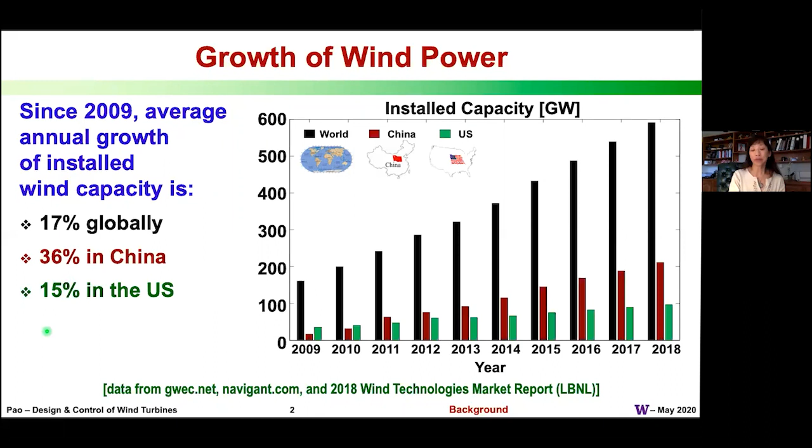Over that decade, the global installed wind power capacity grew at an annual rate of about 17%. And I think it's pretty safe to say that in 2020 now we're beyond 600 gigawatts of installed wind power capacity worldwide. The number one country in terms of installed wind power capacity is China, and they've had an incredible annual rate of growth of about 36%. The US is actually number two, and we've had an annual growth of about 15%. Together, China and the US have more than half of the world's installed wind power.

Now, another way that we can compare countries in terms of wind energy is to look at wind penetration. Here what we mean is the amount of a country's electrical energy needs that is being met by wind. In this regard, Denmark is by far the number one country. In Denmark, more than 40% of their electrical energy needs is met by wind energy, and this is an average across a year. They do instantaneously hit 100% wind penetration at times, in which case they're trying to export their wind power to nearby countries. In general, European countries do quite well in terms of wind penetration.

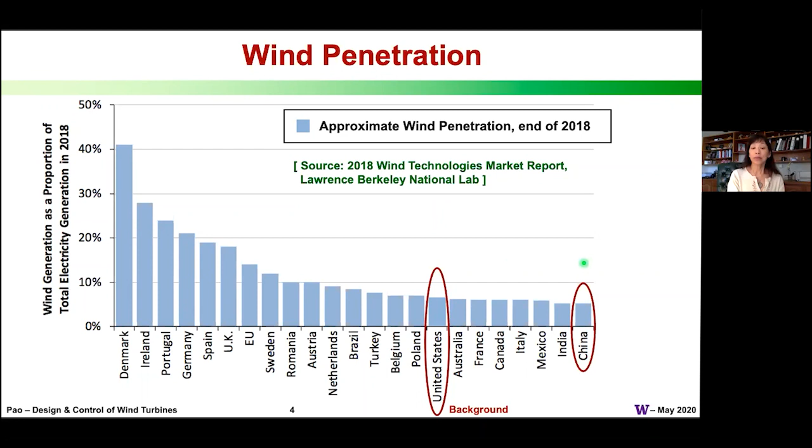China, for all its installed wind power capacity, actually is only at 5% wind penetration. They have a very large population, so large electrical demand, and only 5% wind penetration. The US has a lower population, but we tend to be energy hogs, and so we only have about 6.5% wind penetration. But the point here is that there is a lot of room for growth.

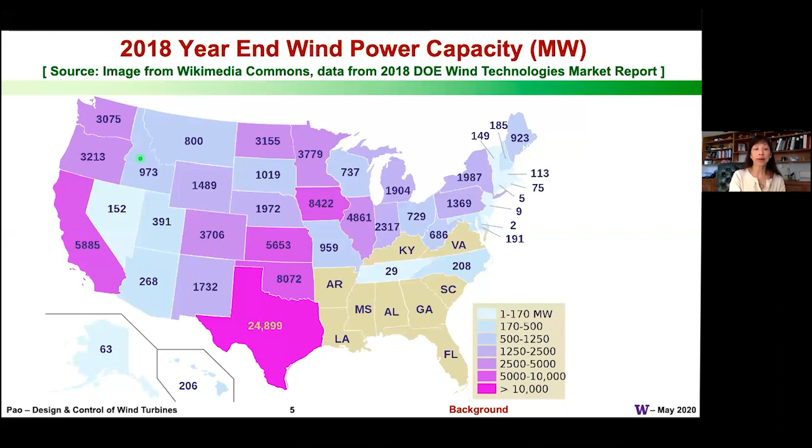Now, I thought it might be fun to look by state, and in terms of installed wind power capacity, Texas is by far the number one state. In Colorado, we're not doing too badly. We're ranked 8th, and Washington State also does pretty well. You're ranked 11th. Now, if we look at wind penetration, Kansas is the number one state, and Iowa also has more than 30% wind penetration. So Colorado and Washington State do relatively well in the top 20.

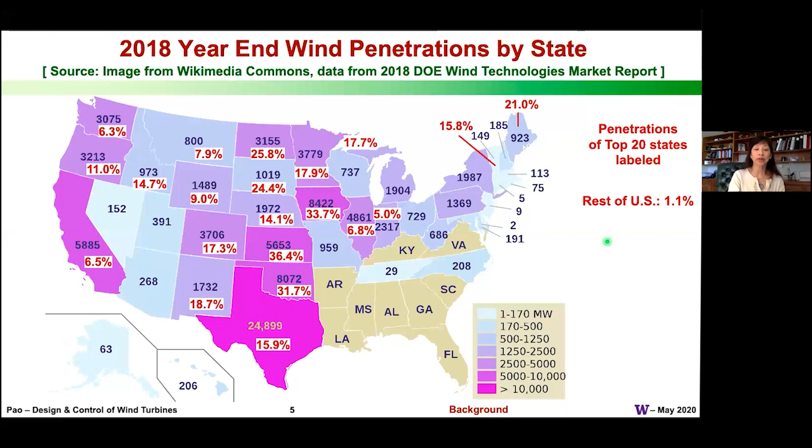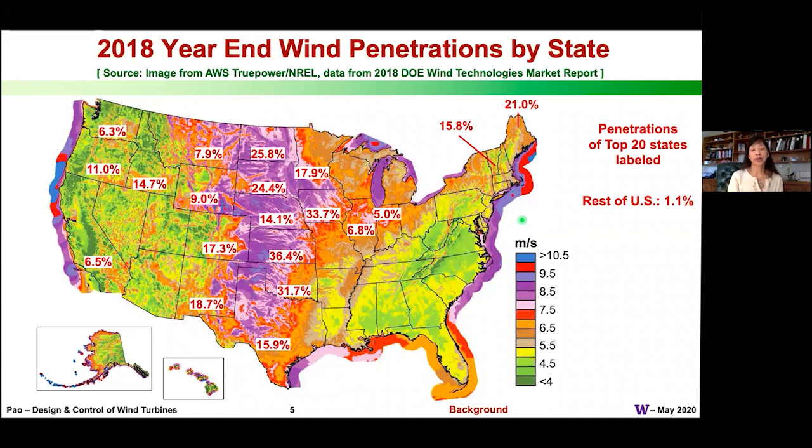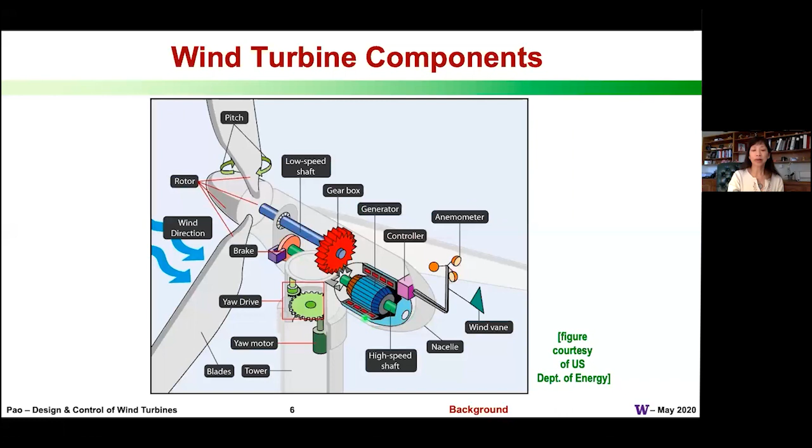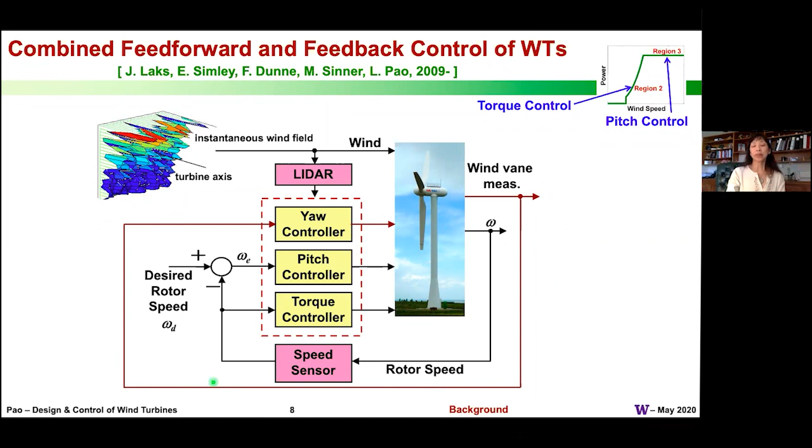So I wanted to give this overall view of some of the work that we've done in combined feed-forward feedback control of wind turbines. But that's not the main focus of this talk.

In this talk, I'd like to highlight a large interdisciplinary project that we've had the privilege to be a part of. We're trying to design a new concept wind turbine at a very large scale. We ended up having to work very closely together as a large team, and we developed what we call this aero-structural control co-design approach to optimize the design and control of this novel concept turbine. I'll talk about some field testing that we've also done for the novel concept turbine, and I'll talk about a control approach that we're developing that helps us to reduce the cost of wind energy. Then I'll summarize, and as there is time, I might briefly outline some areas of ongoing and future work.

The main points of the earlier discussion on wind energy are that the wind industry generally is doing pretty well. This pandemic has thrown a wrench into the wind industry as well as many other industries, but hopefully the wind industry will continue to do well. And the other main point is that there's still a lot of room for growth for the wind energy industry, and in particular for US wind energy.

What the wind industry has continually tried to do as it competes with other sources of energy is to continue to drive down the cost of wind energy, to drive down what we call the levelized cost of energy. This LCOE is equal to the sum of the costs over the lifetime of a power plant. This could be a wind farm, it could be a natural gas plant, whatnot. And the denominator is the sum of the energy produced over the lifetime. LCOE is used to compare the cost of one type of energy with another type of energy.

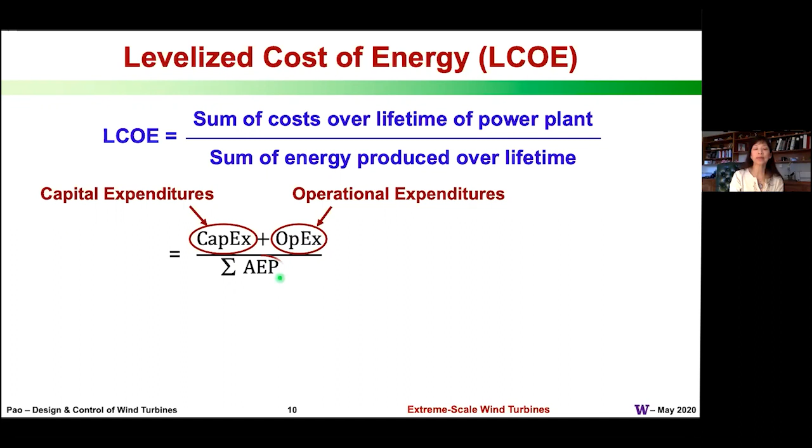In the numerator, the costs include the capital expenditures. How expensive is it to build that wind farm? How expensive is it to build that natural gas power plant? Also included in the numerator are the operating expenditures. How expensive is it to run the wind farm? Included in the operational expenditures are the fuel costs, which happen to be free for wind, solar, and hydro. It's not free for fossil fuel-based power plants. In the denominator, we sum the annual energy produced over the lifetime of the power plant. So what we want to try to do is minimize the numerator and maximize the denominator.

Now, usually in my past work, and for most of us on this large project team, we've never really considered levelized cost of energy. The way things have always been translated to us as control systems engineers is that in region 2, we want to try to maximize power capture. In region 3, we want to try to regulate power capture.

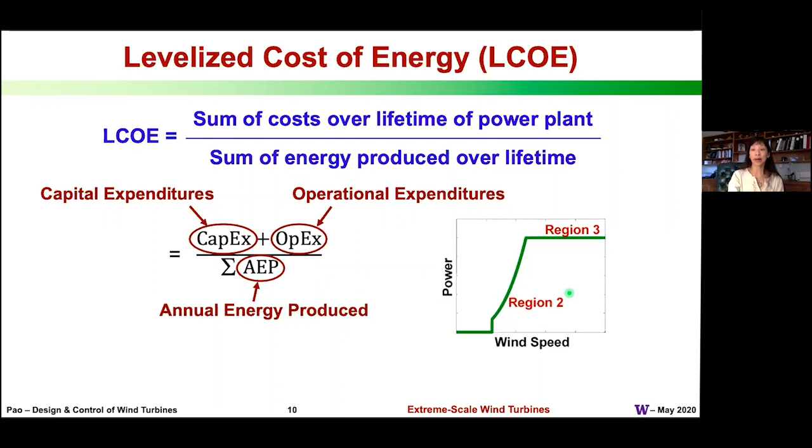And as we've better understood the overall goal of trying to reduce the levelized cost of energy, that has also opened our eyes to maybe try to do the control in better ways. And I'll briefly touch upon that later.

So how has the wind industry largely tried to drive down the levelized cost of energy? It's largely done so by going to larger and larger wind turbines. And as it has gone to larger turbines, that levelized cost of energy has generally trended downward. Now, the typical wind turbine size these days ranges from 3 to 5 megawatts, the most popular sizes that are installed. So a 5 megawatt turbine typically is 100 meters at hub height and has approximately 60 to 65 meter long blades.

Now, when you see a wind turbine off in the distance, it's hard to really appreciate just how large it is. And so I like to compare this rotor size to the Boeing 747 and an American football field, including the end zones. So these 5 megawatt turbines are really large, complex machines, and they have to be designed and controlled appropriately.

Now, there are already commercial turbines that are even larger. For land-based turbines, you probably won't see larger than 5 megawatts, because there are very difficult transportation constraints over land at sizes beyond 5 megawatts. Offshore, there are fewer transportation constraints, so you do see larger turbines already. There are 6, 7, 8, even 9 megawatt commercial offshore wind turbines. Vestas has a 9.5 megawatt turbine that's already in commercial operation at some different sites, and that turbine has over 80 meter blades.

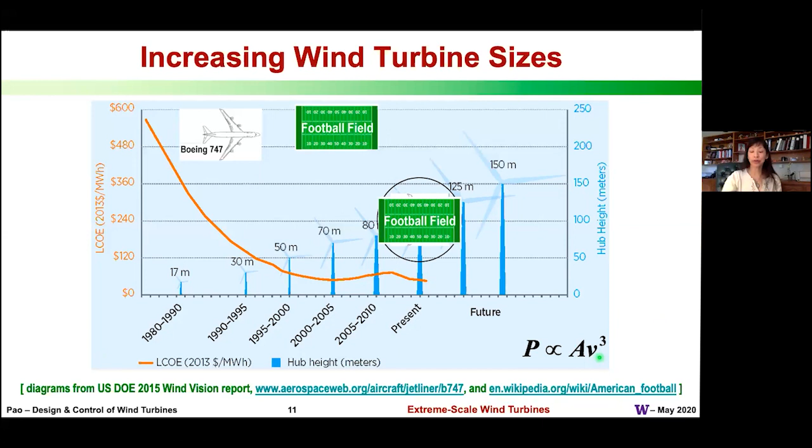But can we continue to upscale? Is there a limit to this? This is a figure from a series of studies done at Sandia National Laboratories, where Todd Griffith led these studies. They were considering 13 megawatt turbines with approximately 100 meter blades. They did an initial design where they just did an all fiberglass blade design. It ended up being really massive. Then through a series of innovations, including advanced materials, they were able to drive down the mass, and their final design, their best design, is down here.

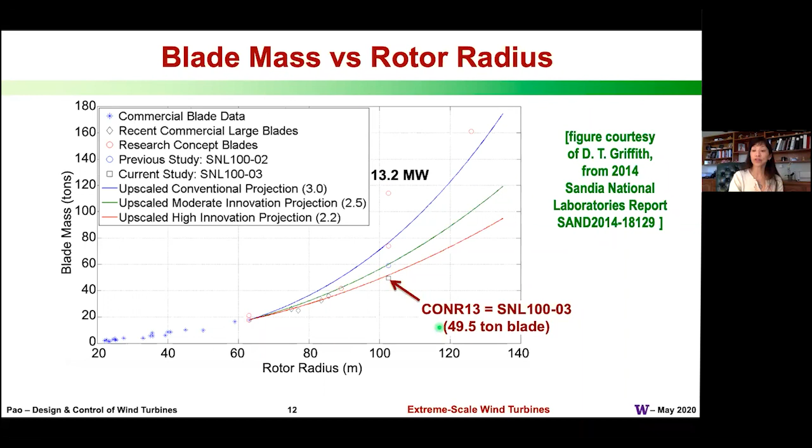But even at this best design, it's generally believed that for upwind turbines, the blade mass is going to grow at least quadratically with the blade length. And that's one of the challenges as you go to larger and larger turbines: you're going to have these very massive blades. So in our novel concept turbine that we're trying to develop, we are going to compare our results to this best design out of the series of studies. We're going to call this the CONR13, the conventional rotor design at 13 megawatts.

So our concept that we're trying to develop is a 2-bladed, downwind, very lightweight rotor. We're bio-inspired by palm trees, which are lightweight. They do morph with the wind, downwind, and they can survive hurricane conditions. And so we want to develop wind turbines that could survive, say, off the Atlantic coast, where there are hurricanes. We call our concept a segmented ultralight morphing rotor, or SUMR. I'll be referring to the SUMR 13 as a 13 megawatt SUMR.

And so the idea is that when you have a conventional upwind rotor, the net gravitational, centrifugal, and thrust loads create a downwind load on the blades. And so as the blades rotate, you really have to worry about whether the blades might strike the tower. To prevent that tower strike, these blades have to be kept stiff as they get longer and longer. And that's what's driving that at least quadratic growth in mass of the blades as a function of blade length. So as you get longer and longer blades, you end up with these really massive blades. There's a lot of material that goes into it, so the capital expenditures are high, and it's also very expensive to transport and assemble these massive turbines. And so our idea is that as we go to larger turbines, we want to consider a downwind configuration, where we can use much lighter weight blades.

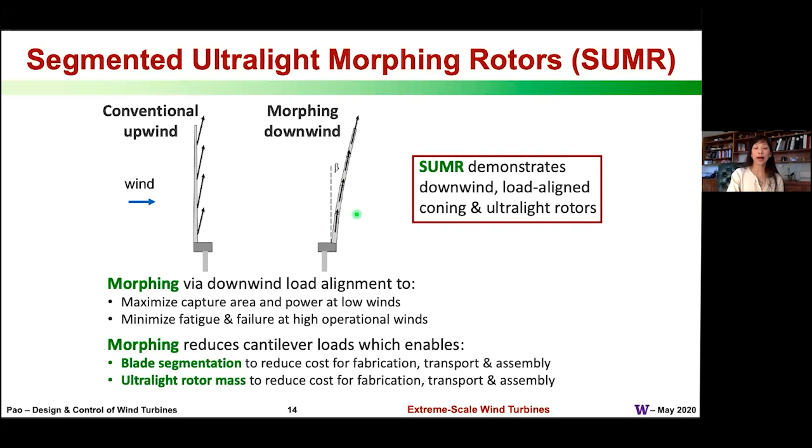And so in phase 1 of the project, we were really trying to develop and demonstrate the downwind, really lightweight and load aligned with coning aspect. And so what we did as a team is we developed a number of these two-bladed downwind rotors, and we initially followed what is typically the traditional wind turbine design process, where usually the aerodynamic design of the rotor is done first, and then the detailed structural layup of the materials in the manufacture of the blades is designed next. Usually by the time the control systems designers get involved, the wind turbine is essentially already designed.

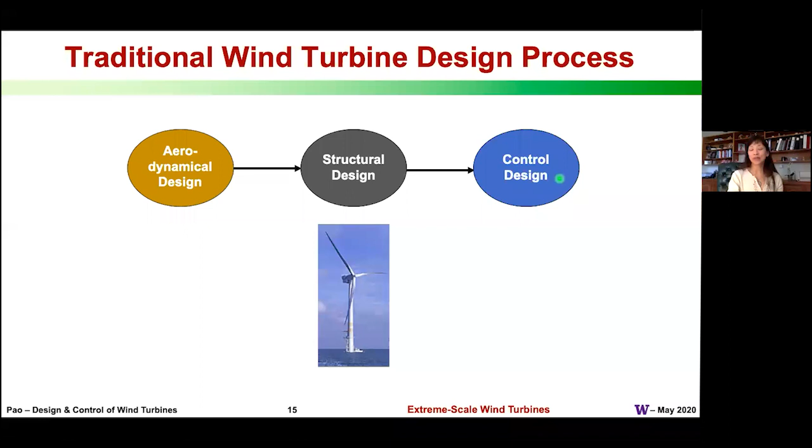And we're just asked to develop the best controller that we can for this wind turbine, usually to try to maximize wind power capture in region 2 and try to regulate power capture in region 3. Now, it turned out that in this overall project with ARPA-E, the funding agency, we set some pretty aggressive milestones. And we had a very aggressive milestone in year 2, where we ultimately felt we had to work much more closely together and improve our iterations. And ultimately, we ended up with a design process that looked a little more like the following.

So initially, we did that sequential design process, came up with an initial SUMR design. We developed a controller for it. Then we evaluated the wind turbine system in relatively high fidelity simulation, where we evaluate a number of different wind conditions through what are called design load cases, different types of turbulent wind conditions, realistic wind scenarios. We assess the annual energy produced and the structural loads, and this performance we can feed back to improve the controller design, improve the tuning of the controller, and the performance is also fed back to the aero and structural teams to iterate on the turbine design.

Now, most of us working in this aspect had never used levelized cost of energy as a performance metric in the past. But here, being funded by ARPA-E asked us to have a very aggressive LCOE goal. And so we worked with collaborators at NREL, where they have detailed cost models. They can take the turbine design and the performance that is demonstrated through detailed simulations, and they can come up with a relatively accurate estimate of the levelized cost of energy. And so then this is fed back and we iterate.

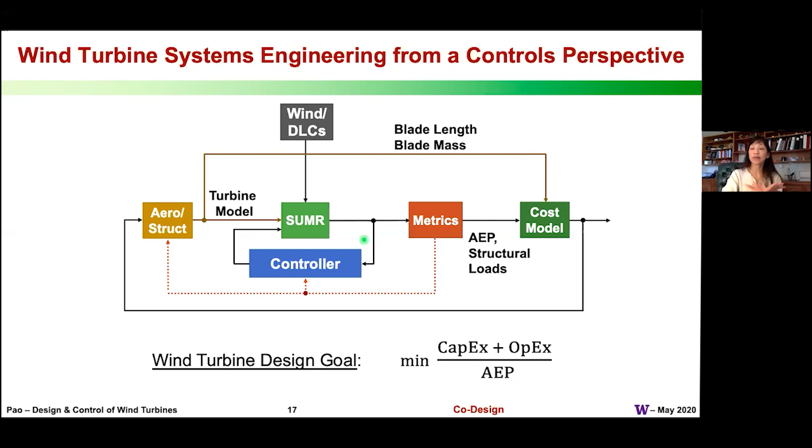And so my PhD student, Dan Zalkind, and I kind of led this study where we did a number of trade studies. We came up with harmonic model analysis, a number of simplifications where we could evaluate many designs more quickly. So after the first detailed 13 megawatt design, which we call SUMR-13A, so it had about 100 meter blades and a downwind coning angle of 5 degrees. So in size, it was about the same as the CONR-13, except it was more lightweight. So we had that 25% mass reduction.

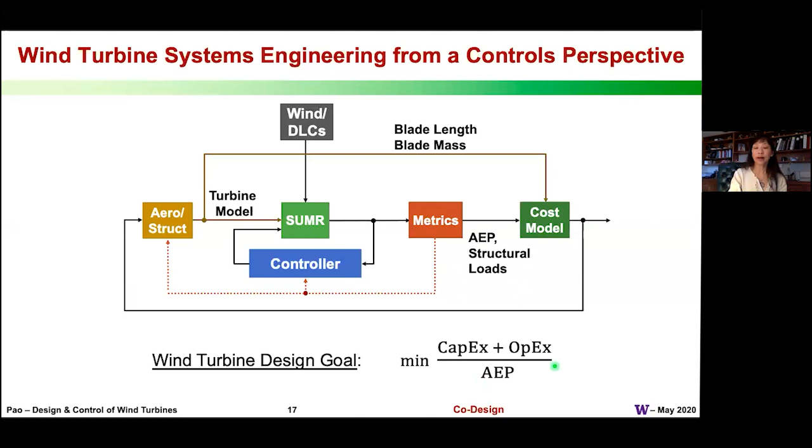Then we wanted to vary a number of parameters and see if we can improve relative to the SUMR-13. So everything here is going to be normalized to the SUMR-13A. We're going to look at, can we increase annual energy production while keeping the structural load below where it was. And in initial studies, what we found is increasing that annual energy produced is the biggest factor in being able to reduce this levelized cost of energy. And so we varied blade lengths, and we found naturally that as you increase blade lengths, you're going to increase annual energy produced, but you're also going to increase structural loads.

We also varied what's called axial induction factor, and at the same time we increased blade length. So the axial induction factor, if you will, is a greediness factor. When it's set to 1/3, then the wind turbine is designed and controlled to be as greedy as possible. And that's the usual axial induction factor that's used. And if we reduce that greediness factor, which we did here, if we reduce it by itself, what it'll do is reduce annual energy production and also reduce structural loads.

And so what we did is we decrease axial induction and at the same time increase blade length to try to keep that power production up. And what we found is we could do the combination of decreasing axial induction and increasing blade length such that overall we're increasing annual energy produced while keeping the structural load below this unity line. And so that was really exciting to us.

Now, we also evaluated different cone angles. We evaluated both upwind configurations as well as downwind configurations. The focus of the ARPA-E project was on downwind configuration. So looking at the downwind configuration, if we increase that downwind coning angle up to 20 degrees, we can reduce the structural loads by almost 30%, while only giving up less than 8% of annual energy produced. So that to us was a worthwhile kind of trade-off.

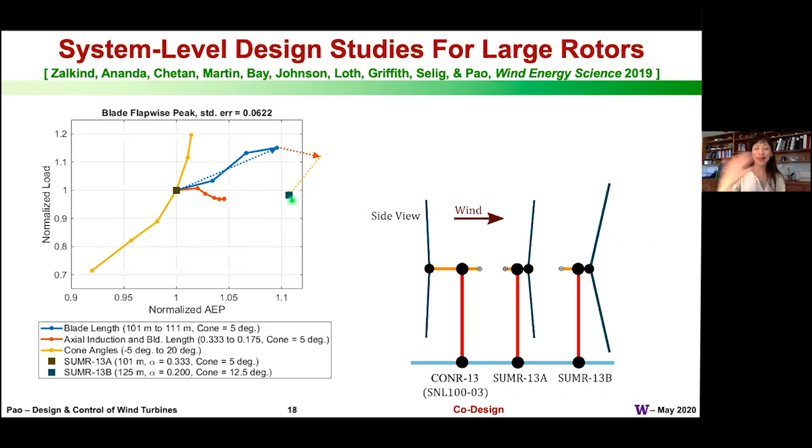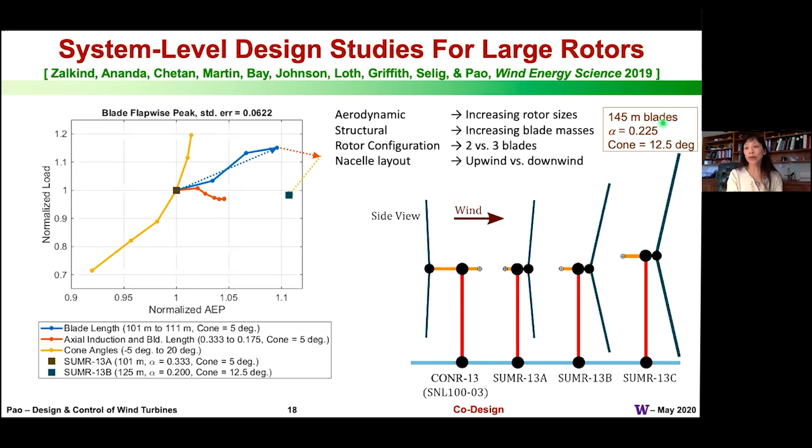So then at this point, we felt confident we could meet our year 2 go, no go milestone. So we continued to iterate, varying blade lengths, assessing effects on the blade mass. In this overall study, we considered both two-bladed and three-bladed configurations, upwind and downwind configurations. But our focus on the ARPA-E projects is two-bladed downwind. And so our final design that we recommended to do in detail, which is what we call SUMR-13C, had 145-meter blades, axial induction a little bit greater than 1/5, and we preserved that downwind coning angle of 12.5 degrees. And this is what led us to meet our year 2 go, no go milestone.

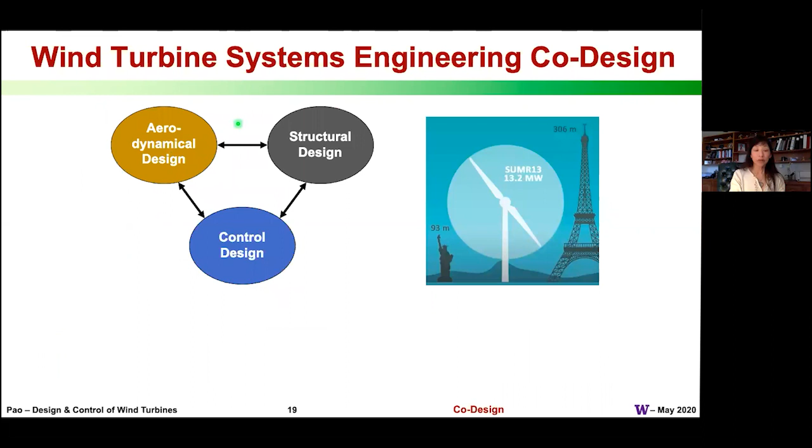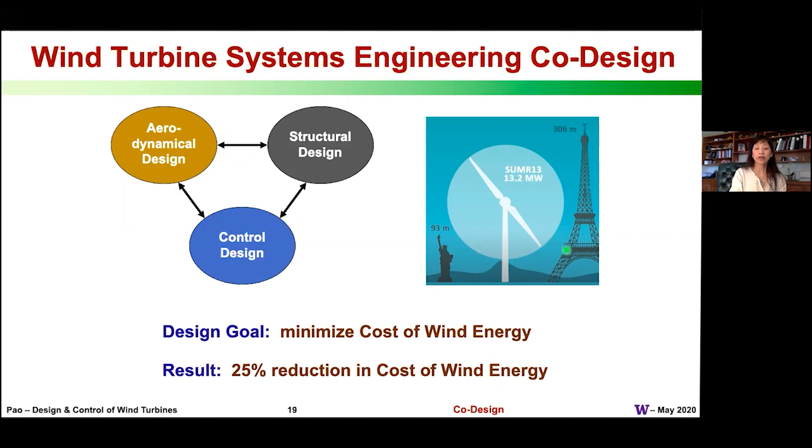So we essentially did kind of this aerostructural control co-design, and we iterated on the design of the 13 megawatt turbine until we met our 25% LCOE reduction. So we increased the blade length quite significantly. That's what allowed us to really increase the annual energy production, so by about 34% relative to the CONR-13. And it's this increase in annual energy production that really drove down that LCOE by 25%.

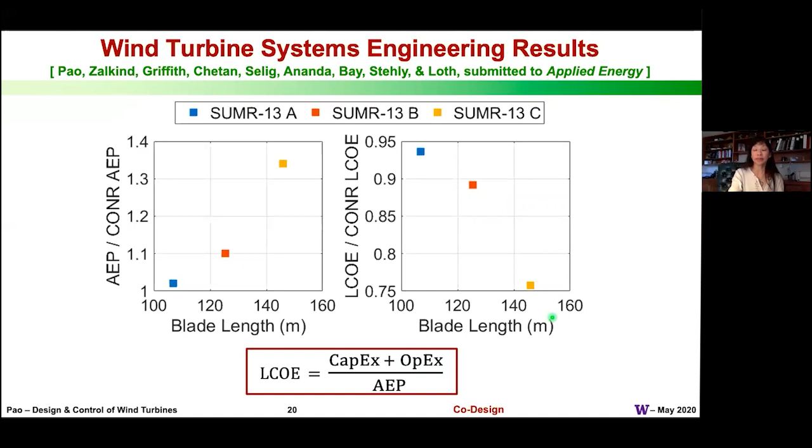Now you might ask, well, we increased the blade length by so much, haven't we increased the CapEx? Yes, we have increased the CapEx, but not by that much. It turns out that CapEx typically is about 75% of the numerator, and that the turbine CapEx is about 1/3 of the overall CapEx. And the blades are only part of the turbine. There's also the nacelle, the generator, the tower. So by increasing the blades this significantly in length, we actually only increase the overall CapEx by about 7%. And so it's really that increase in AEP that really allowed us to drive down that LCOE. So this was really exciting to have met that goal.

So this balance of system, you might wonder what that is. That includes, for land-based turbines, all the concrete for installing the turbine, includes the cabling, how do you transmit the power from the turbine onto the utility grid, etc.

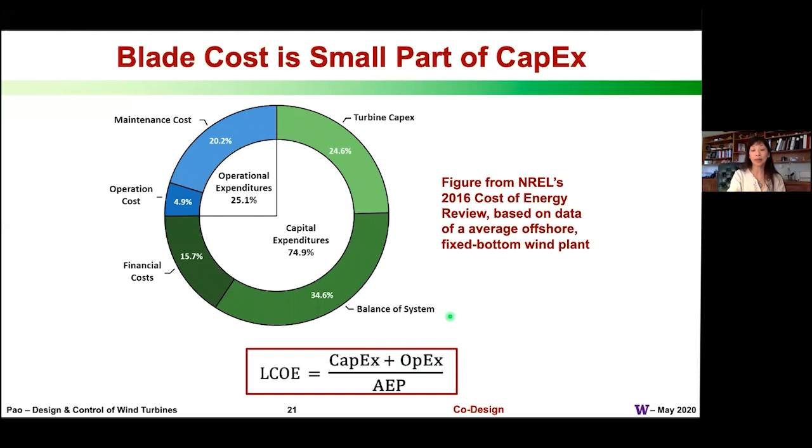And that does end up being quite a significant chunk there. All right, so in many aspects of this project, which I won't have time to go into, let me just highlight the major points.

We did our first detailed 13 megawatt design, which we called SUMR-13A. And we actually aeroelastically scaled that down to approximately 21 meter blades because we wanted to manufacture those blades and actually demonstrate this concept in experimental field testing. Now, while those blades were being manufactured is when we did our aerostructural control co-design iterations to try to meet our LCOE goal for year 2. We've also scaled upwards and have done a series of 25 megawatt designs and a series of 50 megawatt designs. And here we're getting to more than 250 meter blades, really, really extreme scale.

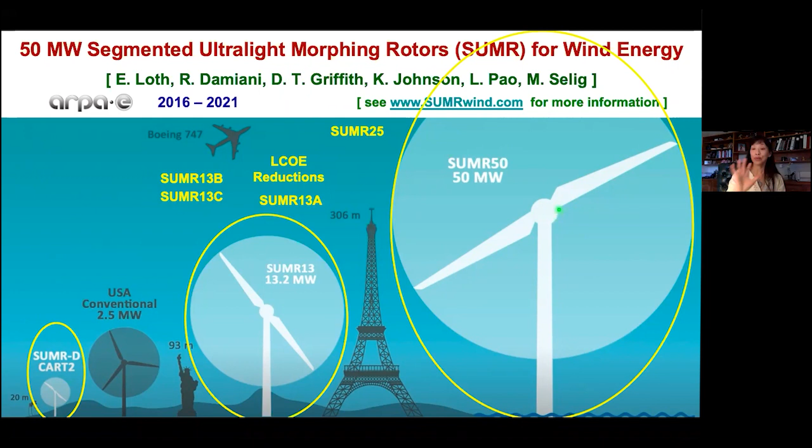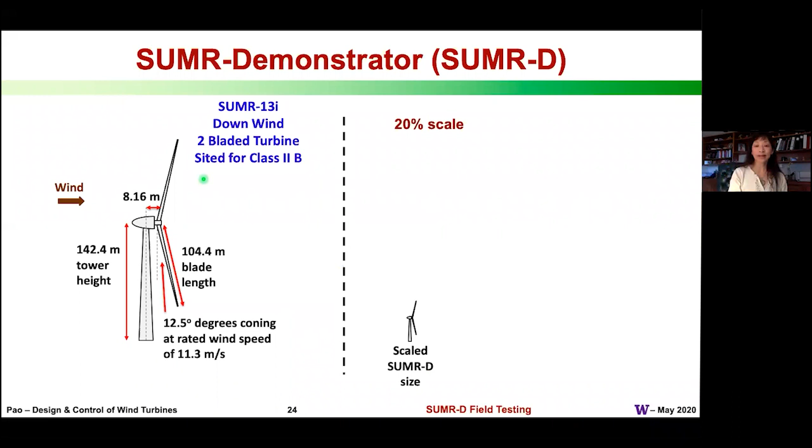I don't have time to go into the details of all of this, but I would like to highlight some of the main points on our field testing. Full disclosure, we actually had many more detailed designs than those three designs. We had multiple SUMR-13As, if you will, and the particular one that we scaled down is what we had called SUMR-13i. So it had 104.4 meter blades, and we scaled down to 20% scale. If I labeled it on here, you won't be able to read it, so I'm just going to label it on a larger one. So we had about 21 meter blades and we preserved that 12.5 degrees of downwind coning.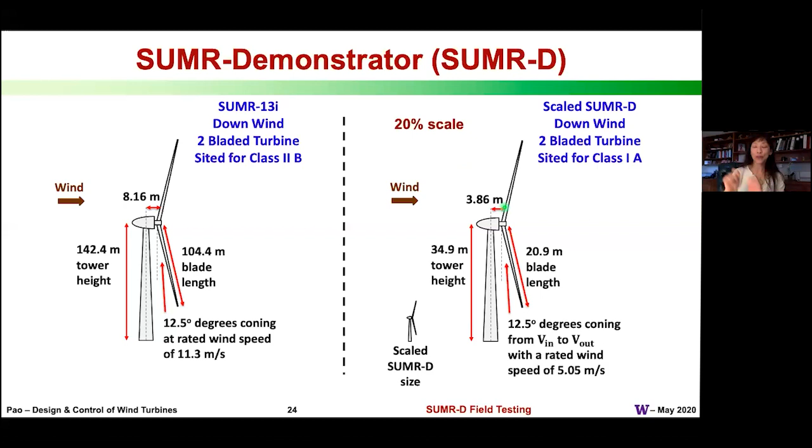Now the 13 megawatt designs were designed for an offshore site off the coast of Virginia, where there's kind of medium winds, medium turbulence levels. So for this SUMR demonstrator, which we're calling SUMR-D, we're actually field testing at the National Renewable Energy Lab, so at NREL, and there they have very high wind conditions and very high turbulence levels. So we actually had to do some control co-design iterations at the SUMR-D scale to ensure that the blades that were manufactured would survive the NREL site conditions.

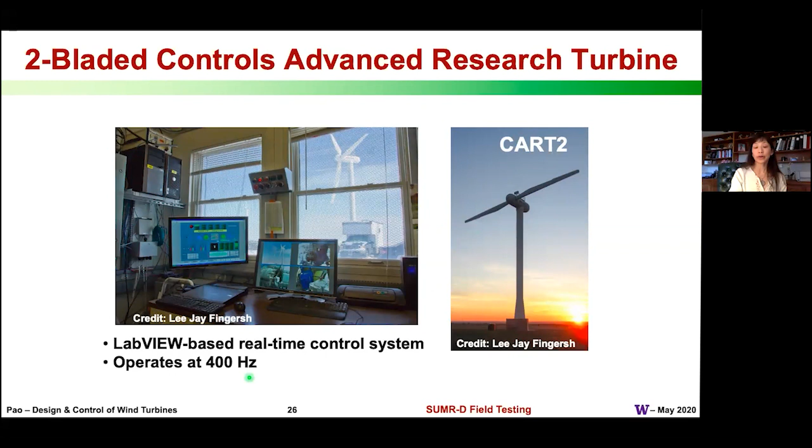The two-bladed platform is the one we used for the SUMR-D. We took off the blades that were on the CART2 and replaced them with our new blades. In this control shed, as it's called, we can see the CART3 out one window and the CART2 out the other window. The real-time control system is implemented in LabVIEW and operates at 400 hertz. Now, the blades are actually manufactured by Janicki Industries, which is located in Washington State. And I don't have time to get into the full details of the manufacturing process.

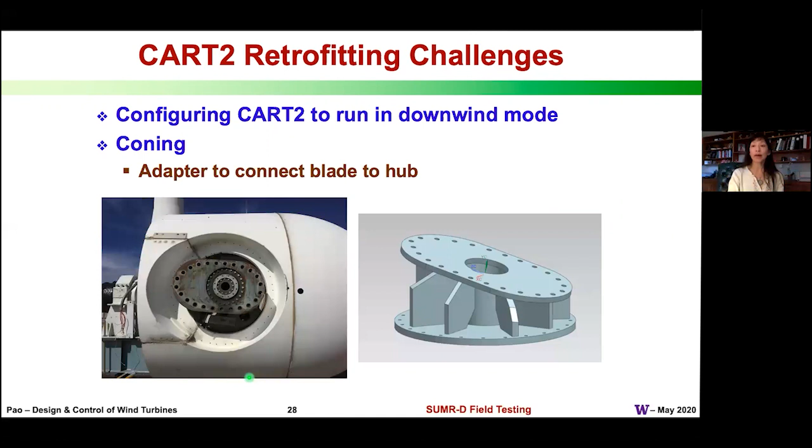We also had to, CART2 is normally an upwind turbine. We had to configure it for downwind operation, and many details had to be sorted out to make that work properly. We also had to design and manufacture an adapter plate in order to mount the blades with that 12.5 degrees of downwind coning. Ultimately, there were many issues that arose, even though this is 20% scale. When you have 21-meter blades, it's still a pretty large experiment, and a lot of little things can go wrong. And ultimately, it took us a full year to get to operational field testing.

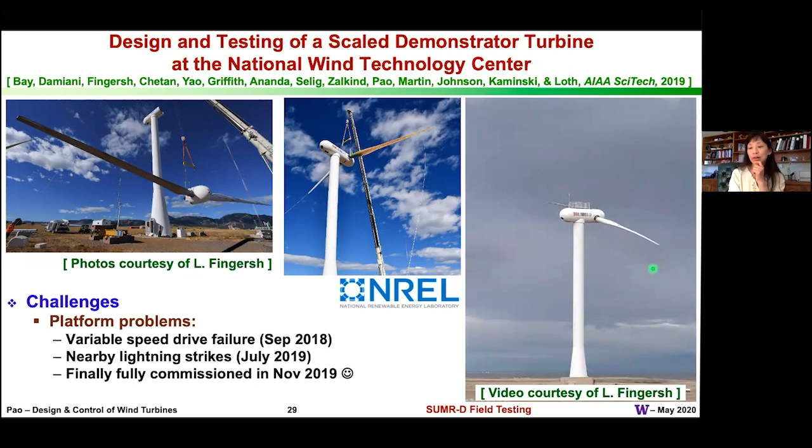And so the blades sat on the turbine in a parked state for quite some time. This video here is showing that even when the wind's blowing, the turbine won't rotate. And the main thing I want to show with this video is just how flexible the blades are. If you look closely, you can see just how flexible they are. So we did get into operational testing finally. And this video was taken maybe about 3 months ago before we went to shelter in place. You can see that it is downwind relative to the other turbines nearby, and you can see that downwind coning.

So after we went into shelter in place, our field experimenting has slowed down quite a bit, but we have been busy analyzing the data that we have collected. I don't have time to get into full details here, but just want to point out that from the controls point of view, one of the things we worry about is trying to control the wind turbine well enough that we don't have generator speed peaks that are too high.

In particular, we don't want to cross a particular threshold, where if that threshold is crossed, the turbine will automatically go into shutdown mode. And we definitely don't want that to happen, because then we'll really lose a lot of annual energy production if that happens too often. We have hundreds of periods of operational data plotted by these blue dots. What's actually plotted is the peak of the generator speed over those operational periods. And out of those hundreds of periods, there were 2 occurrences where it did cause a shutdown.

So we're analyzing those cases more closely, looking at the wind conditions that caused them. We're also trying to reproduce the field results in simulation. So we're trying to reproduce the winds. There are a lot of details that we're trying to work through, but let me move on in the interest of time.

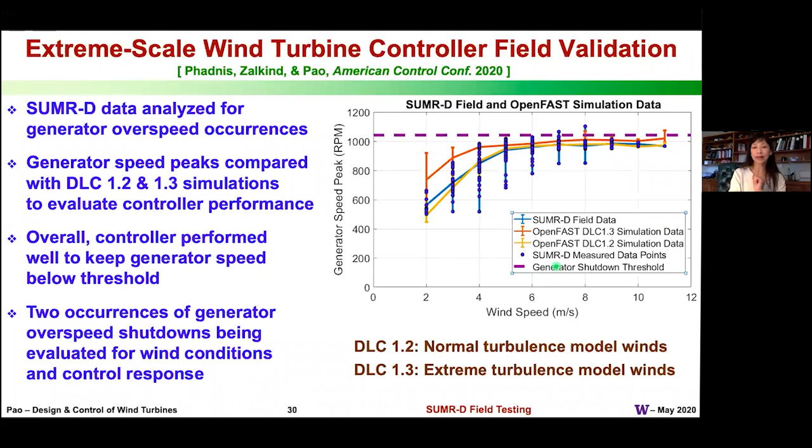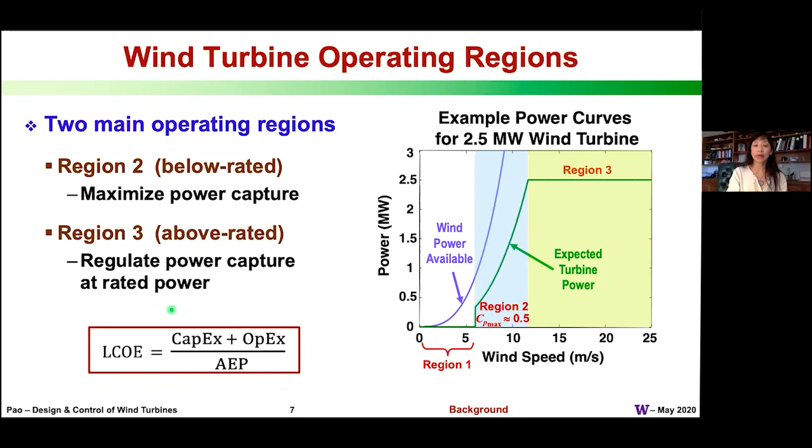One of the controllers that we have tried to develop is what we call a load-constrained power control. Here we're trying to think more broadly, beyond the usual maximize power production in region 2, regulate power in region 3. We're really trying to reduce the levelized cost of energy. What more can we do with the control to reduce that levelized cost of energy? So we're trying to look beyond the existing controllers.

And what we decided, especially looking at all of the data from our detailed simulations of the SUMR rotor, is that what we really want to do is never cause the turbine to go into shutdown mode. So we don't want to, for instance, exceed this maximal generator speed constraint. There are a number of other constraints on different loads that we don't want to exceed. So essentially we want to assess if we're in a safe region, we can then maybe be a little greedier and try to capture more power. If we're in regions where we're getting close to the constraint boundaries, then we want to pull back and even derate, generate less power so we don't get close to those constraint boundaries.

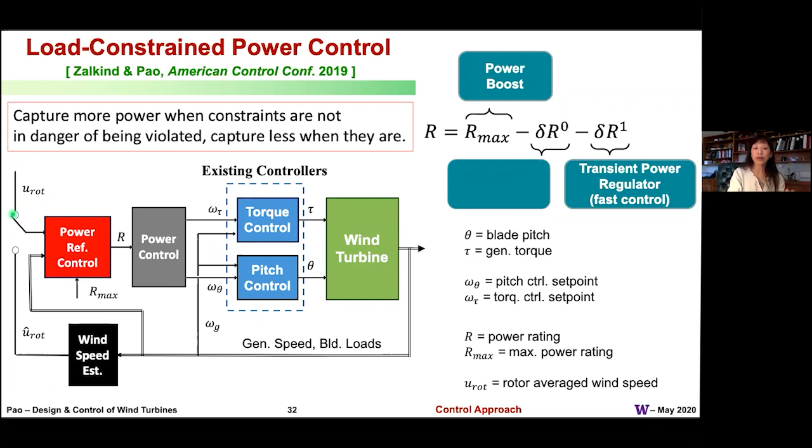So we can use the turbine measurements to estimate the wind speed, or if we have wind speed sensors, we can use those measurements directly. So either way, we have some assessment of the wind situation and we can derate based on that situation. I don't have time to get into the details, but I just want to show the results here.

And so this is really exciting to us because we have a win-win. We're able to capture more power and reduce structural loads. We've developed this controller further over the last year, and we're about to submit a journal submission. Dan Zalkind, my PhD student, used this control approach as the basis for his entry in the ARPA-E ATLANTIS floating offshore wind turbine control challenge, and he ended up winning the $100,000 first prize. That was really exciting. He officially graduated last week and officially started working as a research engineer at NREL yesterday. So I'm sad to see him go, but hopefully we'll continue to collaborate.

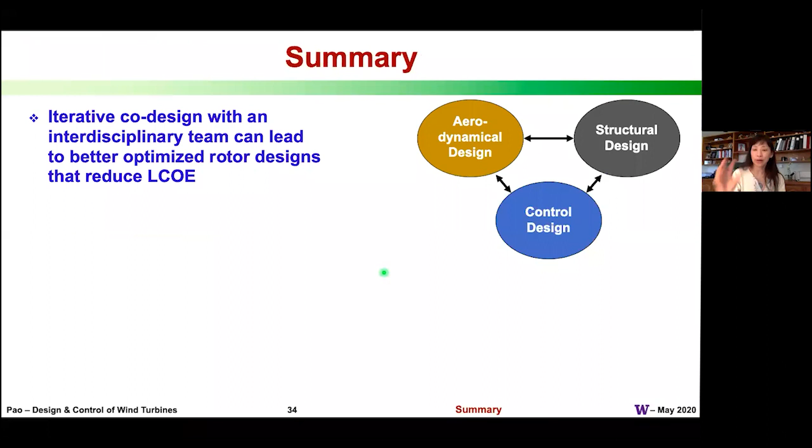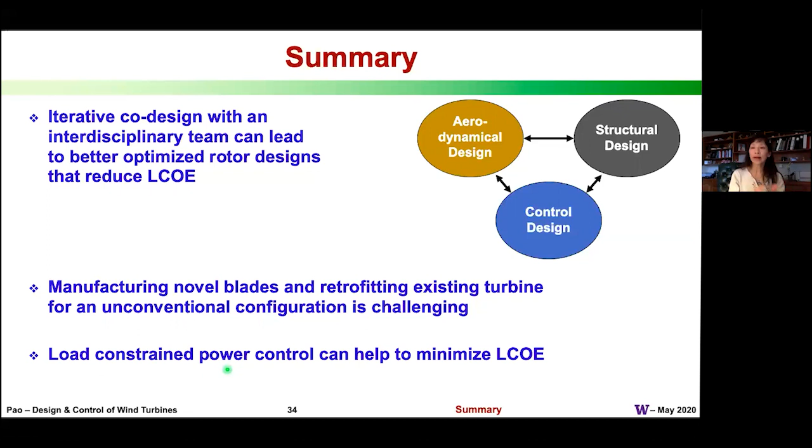So in summary, working together very closely as a team allowed us to do better design of rotors that can lead to lower levelized cost of energy. Doing field testing is very, very challenging, but it's also very satisfying once we have gotten to a successful field test. And this load-constrained power control idea, we think, is a good approach to further minimize the levelized cost of energy. We definitely developed the controller from an applied point of view. We're now trying to establish some theoretical guarantees on the performance.

As I mentioned, our overall project originally was 2016 to 2019. That was phase one of the project. We were invited by ARPA-E to submit a cost extension proposal, which we did, and they've now funded this. We're now focusing at the 25 megawatt level, and we've added General Electric as a partner in this project. We are designing and evaluating 2- and 3-bladed downwind rotors, also including segmentation of the blades and including outboard flaps on the blades. And from a controls point of view, we're hoping to control these flaps to further alleviate structural loads on these really extreme scale turbines.

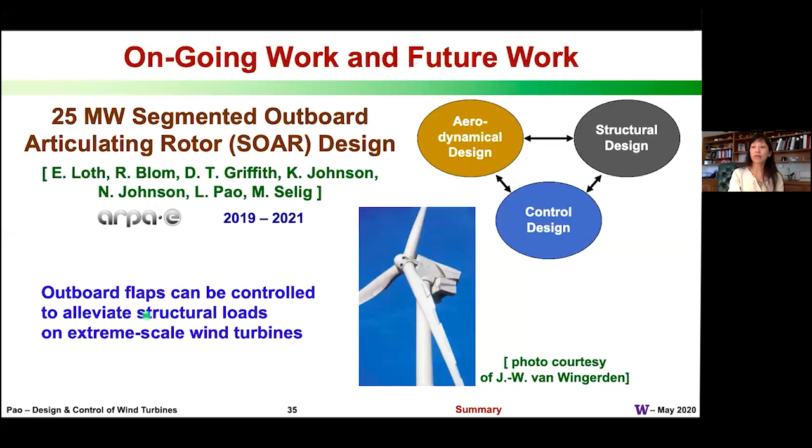Now, just to highlight a few areas of other wind energy work that is becoming very popular in the research community. One is control of wind farms. And here, wind turbines interact with one another through their wakes. This is a now relatively famous photograph of the shallow water offshore wind farm off the coast of Denmark, where as the wind passes through this first row of turbines, you can see these wakes develop.

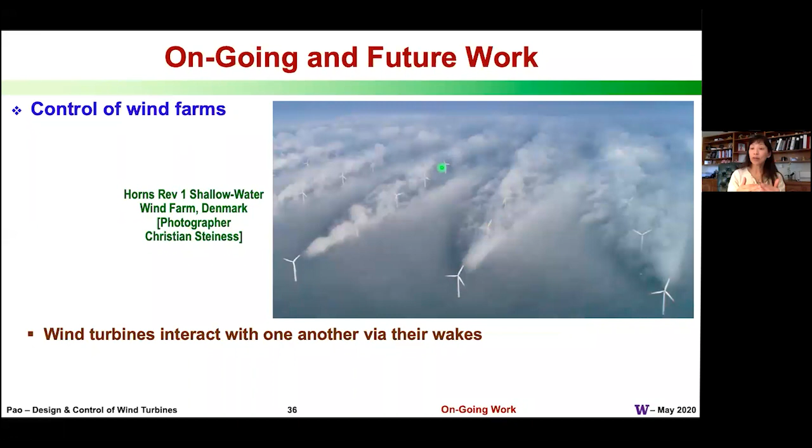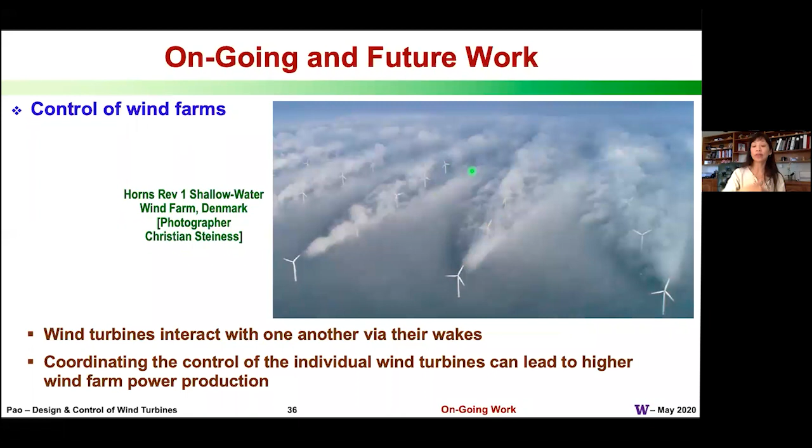Now, the wind speeds are lower in the wakes, and they're also more turbulent. So these rear turbines see lower wind speeds, so they can't generate as much power. They also get beat up more structurally because they're seeing more turbulent winds. So we're trying to understand these wake developments and wake interactions, and then take that information into account and coordinate the control of the wind turbines to improve the wind farm level performance.

And it turns out you can actually improve the wind farm performance quite a bit. The usual way that wind farms are controlled is to have each turbine controlled as greedily as possible. This is what we call a locally greedy approach. Every turbine is facing the wind, and each turbine is trying to be as greedy as possible. Now, in some of our earlier work here, we used past data that had been collected by other groups and developed a steady state wake model where we accounted for yaw errors. And it turns out you can actually yaw the turbines to steer the wakes behind them as much as possible out of the way of the next turbine.

And so we developed this steady state wake model, applied it in solving for the optimal yaw settings, and it turns out that we overall can generate 13% more power than every turbine being as greedy as possible. And on average, we actually see reduced loads, because what happens is by steering the wake out of the way as much as possible, that next turbine sees mostly free stream air, or free stream wind.

And that free stream wind is higher in speed, and that leads to the increase in power capture. But that free stream wind is also less turbulent, and that's what leads to, on average, reduced load. So again, this is exciting because we have that win-win situation with more power production, lower loads. And so these were very high fidelity simulations using NREL's SOWFA tool, the simulator for offshore wind farm applications.

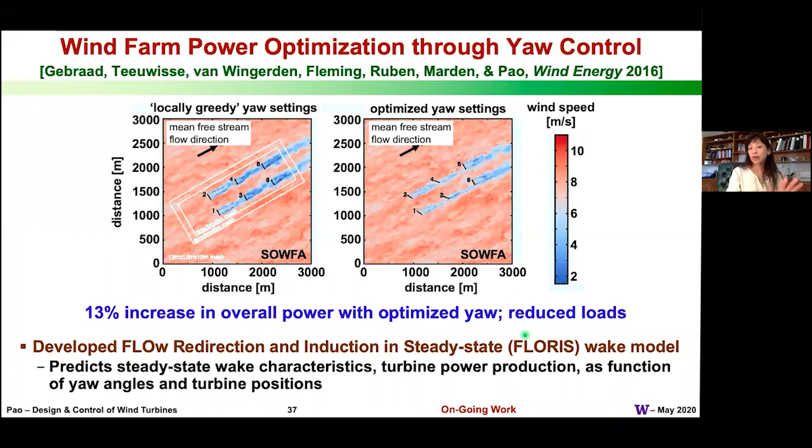So this is now a very popular area of work in terms of wind farm optimization. There's a lot of work still to be done. We only developed a steady state wake model. There are now dynamic wake models that have been developed that are relatively accurate. Now, to actually implement wind farm controllers in practice, we need to have good measurements or estimates of the wind speeds throughout the wind farm, and that's a challenge.

You could use more LiDARs across the wind farm, but that can quickly get expensive. So I have two students working in this area looking at kind of low-cost solutions. So Michael Sinner, my PhD student, just used what I refer to as very poor anemometer and wind vane measurements. They're available on commercial wind turbines, so they're readily available. So can we use those measurements, incorporate a simple dynamic model of the wind field, and use a Kalman filtering approach to estimate the wind speeds?

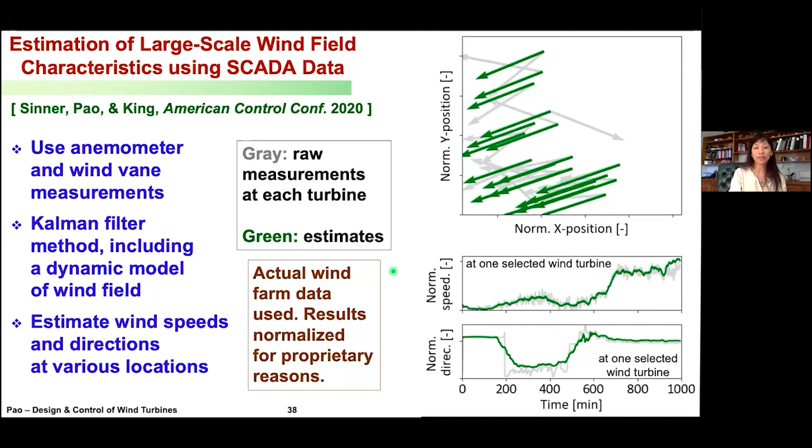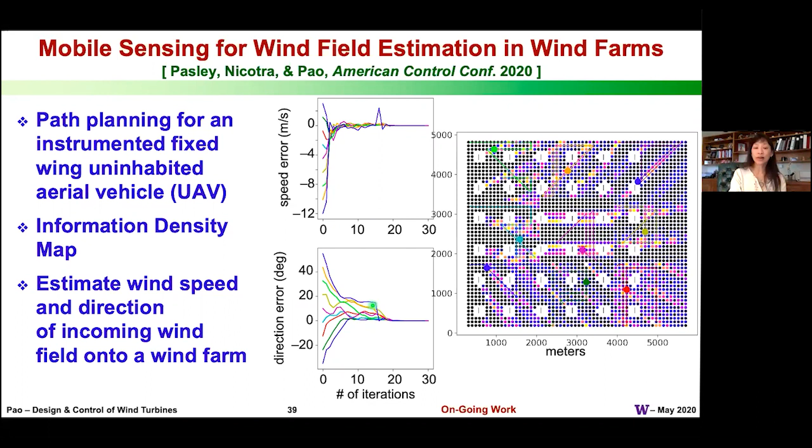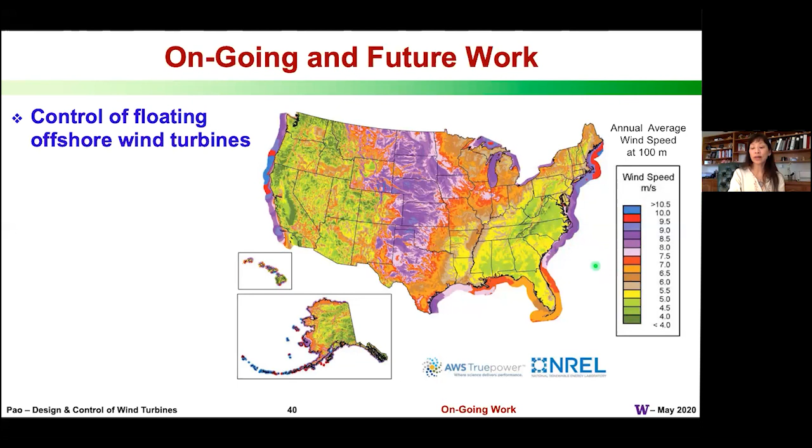Now, I mentioned earlier that some of the best winds around the US are just offshore. And right now there's only one small commercial offshore wind farm. So there's really a lot of area for growth for offshore wind in the US. One of the challenges in the US is that nearly all of the West Coast and some portions of the East Coast, we have deep water. So 99.9% of existing offshore commercial wind farms are in shallow water, where the wind turbines are built all the way down to the seabed. So around the US, most locations are going to require deep water.

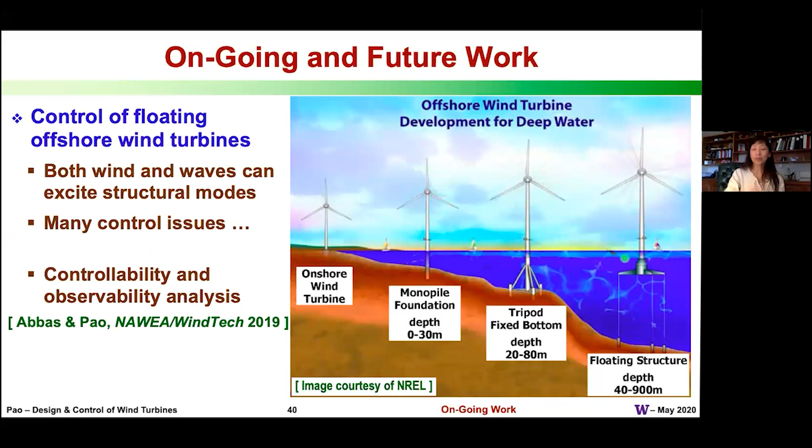And here, economically, it does not make sense to build the turbine all the way down to the ocean floor. So we're really then talking about floating offshore wind turbines. And so here, think of an inverted pendulum with this huge rotor at the top, affected by the wind and the waves. And so there are definitely many control issues. One of my students has done an initial controllability and observability analysis, looking at several typical floating offshore configurations that have been considered, where there are research turbine platforms out there.

And so looking at how much control energy is needed to kind of move back to that vertical position from different offsets. And there are some directions where we require more control energy. Now, the existing research turbines that are floating use floating platforms that are largely borrowed from the oil and gas industry. So they tend to be relatively massive and heavy.

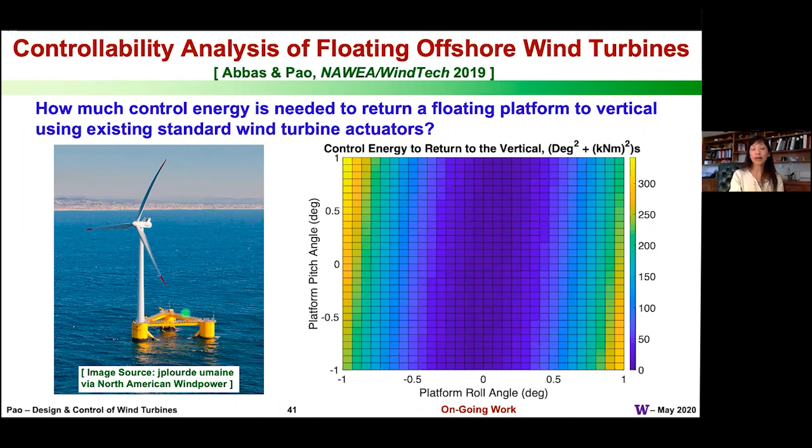And we have a new project funded by ARPA-E, which literally launched on May 1st. So we're just getting started, where we're trying to apply and extend that control co-design approach for floating platforms. Can we design lighter weight platforms targeted for wind turbines, where we can reduce the cost of these platforms and where we can still guarantee stability of the floating platform. So here, Katie Johnson and I are the control systems researchers in this project. We also work together on the SUMR project, and we jointly are seeking a postdoc.

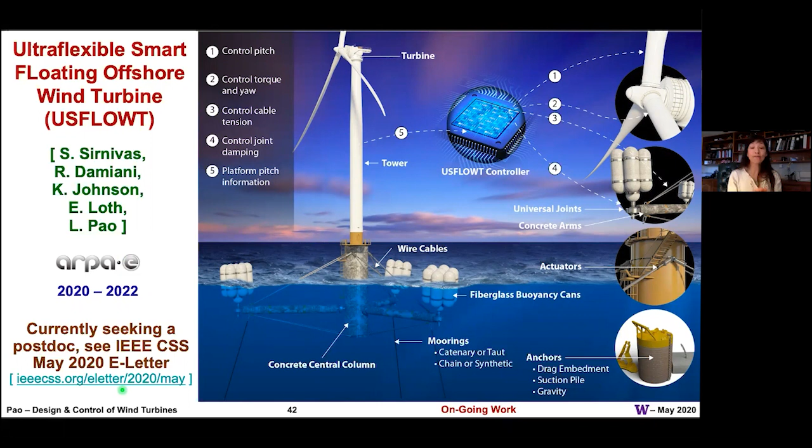All right, one last area I just want to point out is active power control of wind turbines. And this is, again, an area where we're trying to get away from the usual maximize power production in region 2, regulate power production in region 3. Because as we get to higher and higher wind penetrations, 20, 30, 40%, maybe the grid can't take all that wind. Maybe what we need to do is think about things from the grid perspective. Maybe that transmission system operator from the utility grid will tell us how much power we need to be producing

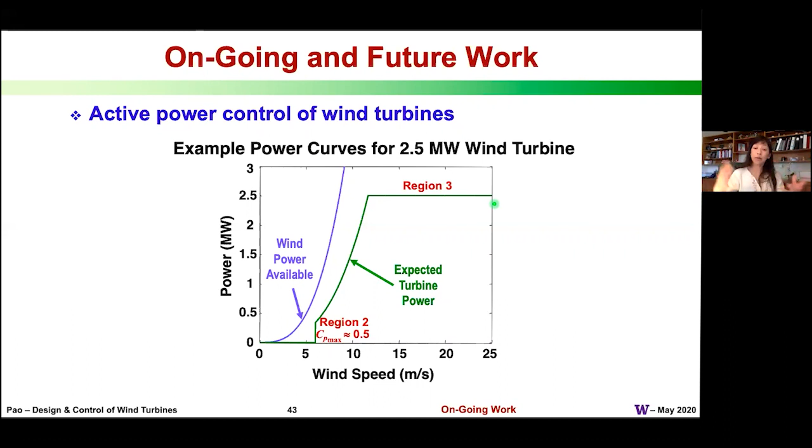from the wind turbine. So if we take, say, a 2.5 megawatt turbine, we derate by 10%, so we're normally operating here, then we could increase or decrease power as the grid needs require. And so we developed a new controller to essentially control the power production of a wind turbine, and we tested it out on the CART3 platform at NREL and showed that we could follow the power reference relatively well. And of course, there are natural extensions to wind farms.

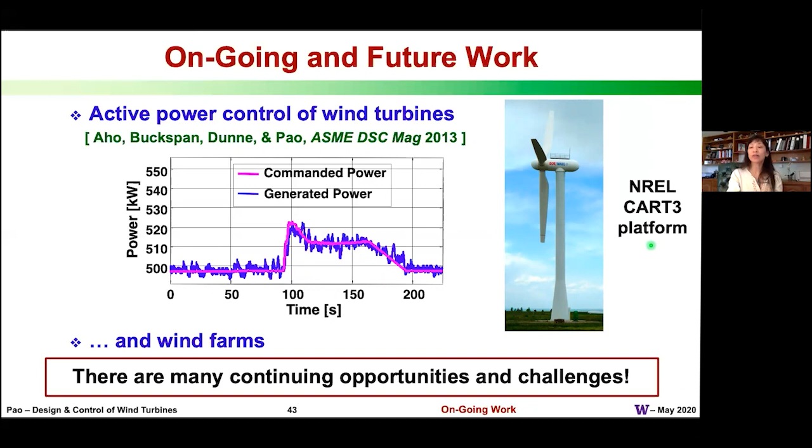So the point of pointing out all these different areas is to say that even though many people say that the wind industry is relatively mature, there's still many areas of challenges, many opportunities. And I was lucky enough to be part of this large group where we met regularly over about a year and a half discussing the major challenges in wind energy, and we came to some consensus of several areas that we called grand challenges in the science and engineering of wind energy production that we think should be addressed over the next 3 decades

or so. And so to close, I'd like to acknowledge ARPA-E and NREL for their support of this research. Envision Energy has also supported some of our wind energy research in recent years. And I've been lucky enough to have some discretionary funds which has allowed my group to really go after some radical ideas. Some of these have worked out well, not all, but it's fun to be able to try.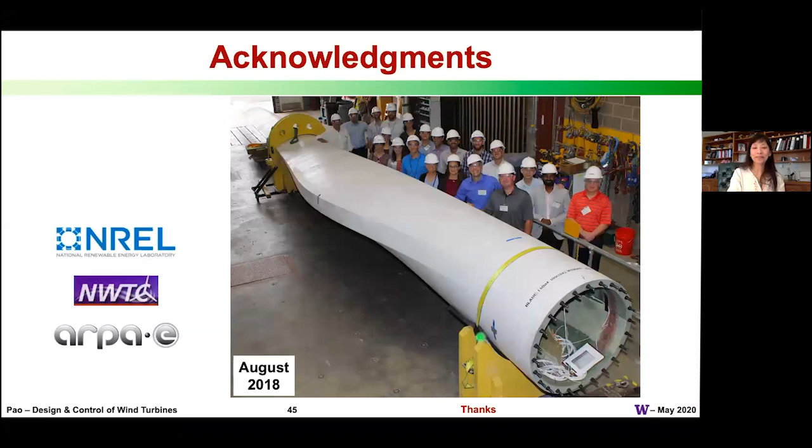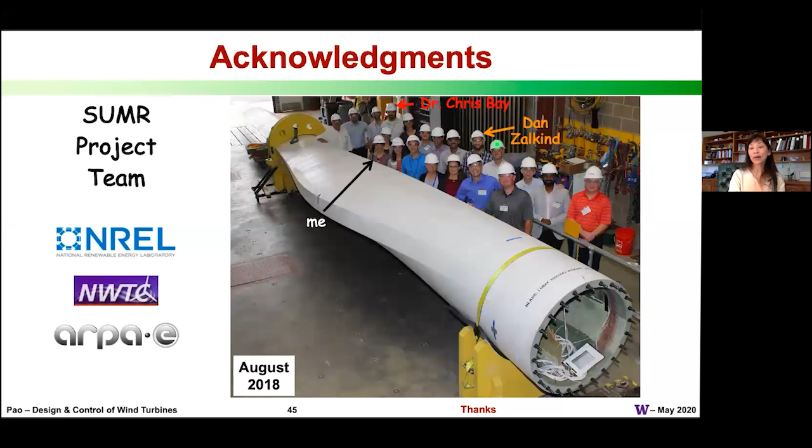The SUMR team has been fantastic. I don't have time to point everyone out. I do want to say that Katie Johnson and I hired Chris Bay as a postdoc jointly a few years ago on the SUMR project. He actually had no wind energy experience prior, and he worked out excellently, and he's loved wind energy. He's actually now working full-time at NREL. And Dan Zalkind, my PhD student who just graduated and also started working at NREL.

So this is the most recent group photo we have. It's already a little bit outdated because Dan here has already graduated, and I have a new student, Mandar Phadnis, who has started in January, doing an excellent job in filling the relatively large shoes that Dan has left.